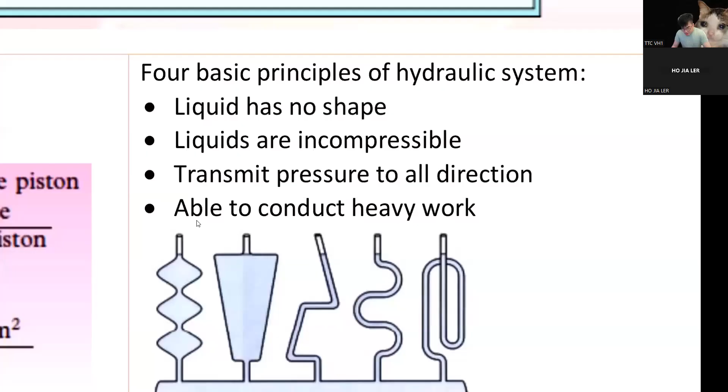Yeah, it's only you alone today. Maybe they're late or whatever, I don't know.

Right, so we're doing something easy today, luckily. Like I said, we have 2 chapters remaining, or 3, I forgot. So we are going into something easy, right? Pressure. This is a physics chapter.

Hello, Charlene. Wow, I haven't seen you in a while. How are you? I haven't seen you in like what, 3 weeks, I guess? 3 weeks. Okay, so we just started.

So guys, we are in chapter 8 today. This chapter is called pressure. And we only have 2 parts here. I'm gonna do one part today, and next week we are gonna do the other part. All right, a very easy and short chapter. I will finish this in 2 lessons, no problem.

Right, guys, shall we begin? Are you ready? Do you have your notes in front of you? Are you ready to absorb? This is quite an easy part to score if it comes out in exam, which is high probability. Right? So I begin. Charlene, Jella, can I get an okay if you are ready? Okay, cool. Right, so here goes.

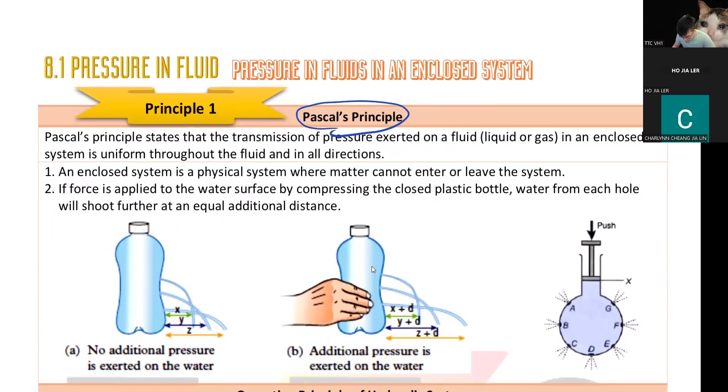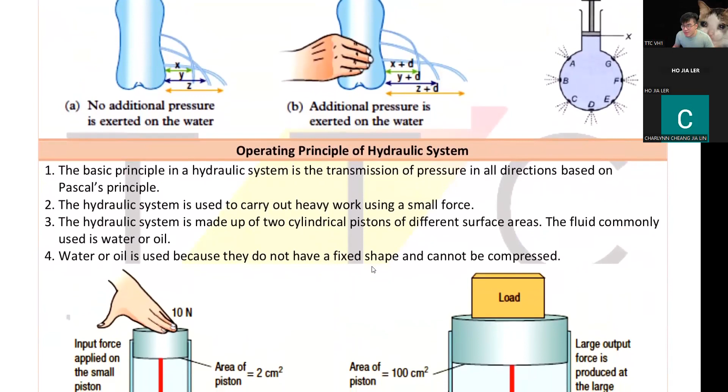This is what I want you to put in your head. Liquid cannot be compressed. Yeah, there, you see, liquids are incompressible. So when we press liquid, the liquid has to go somewhere, and the pressure is equally felt throughout the liquid. This is what Pascal said.

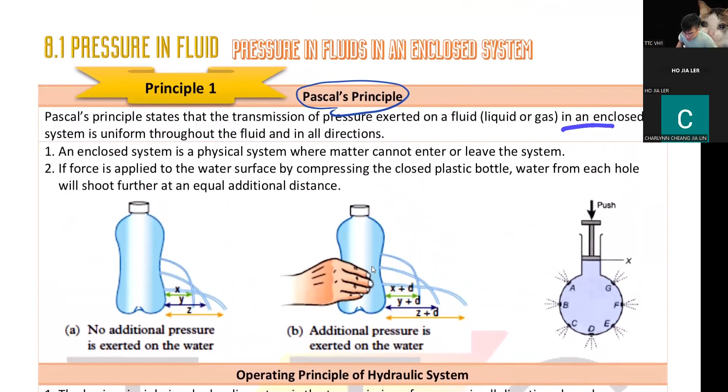Pascal's principle states that the transmission of pressure exerted on a fluid, liquid or gas, in an enclosed system, is uniform throughout the fluid and in all directions. What do I mean? Liquid cannot be compressed, right? So when I have this container which has holes at different points, when I press, this pressure here will be transmitted everywhere equally.

So guys, I have a question here. The water jet spray out from A, B, C, D, E, F, G, is it the same? Do I get any point that has more water, any point that has less water? No, right? So when I press here, I will get water jet spray out equally.

That means pressure is equal everywhere. This is what Pascal principle said. When you compress a liquid, pressure is equal everywhere. Let's say the pressure here is 100 Pa. Pa is the unit. I will get 100 Pa everywhere. No matter where you are in this liquid, you will feel the same amount of pressure.

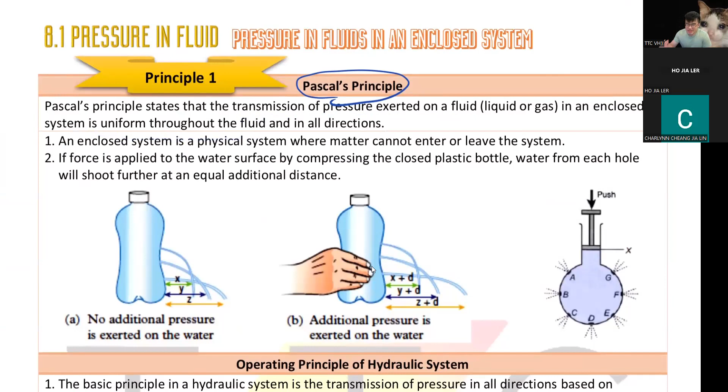All right. So you look at the definition again, you will understand. Transmission of pressure on a fluid is uniform throughout the fluid. You get the same pressure everywhere in the fluid. You guys cool? If you're cool, then I'm moving on. So this thing is where we apply it into hydraulic system.

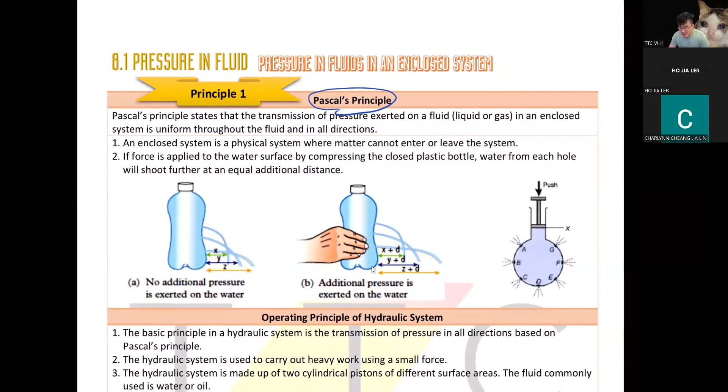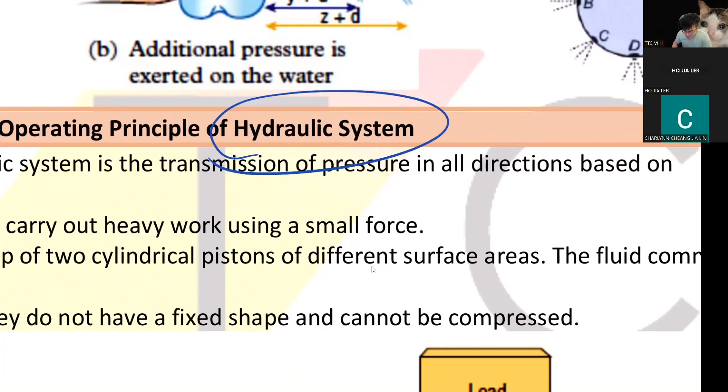Do you know what is a hydraulic system? Hydraulic system is when we use liquid to do work. Okay, guys, can you see I have two pistons here? This thing can freely move up and down. This thing also can move freely up and down.

Guys, question. When I press the first piston down, what's going to happen to the second piston? Can I compress liquid? I cannot compress liquid, right? So when I press the liquid down, let's say I press this down for 5 cm, that 5 cm of liquid has to go somewhere. So what happens to this?

Because you see, liquid cannot be compressed. The liquid has to go somewhere. That means if there's a pressure here, the pressure throughout the liquid is uniform. You see, uniform pressure throughout. That is the meaning of hydraulic. That is Pascal's principle. Okay, guys.

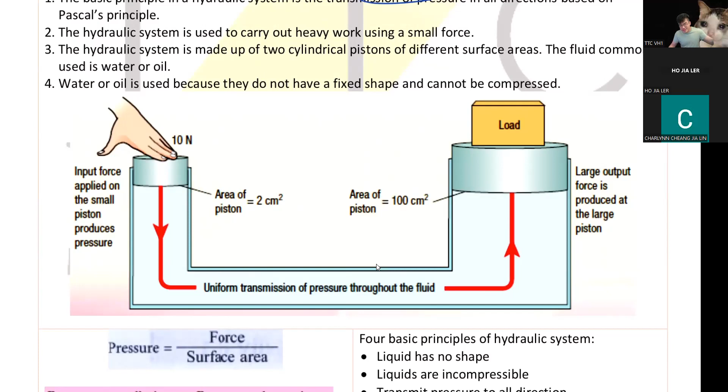Now here comes the calculation. I think this formula you have seen before already. I think you learned this in Form 2. Pressure equals force divided by area. Okay, let's look at this. This is the force, right? This is the area. So, force divided by area, my pressure here is 5. The pressure at the first piston here is 5.

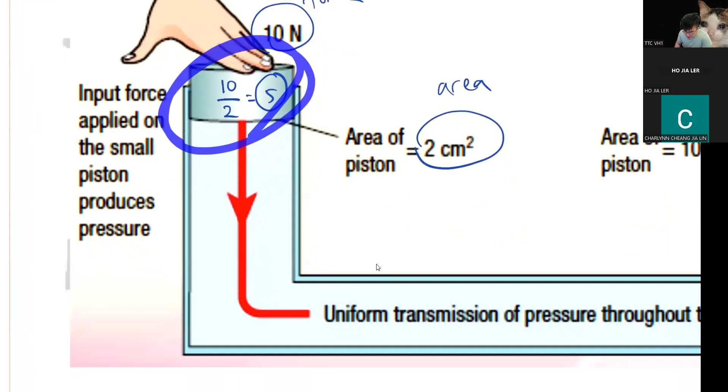That means no matter where I stand in the liquid, I will feel the pressure of 5. Do you understand? No matter where I stand in this liquid, I will get a pressure of 5. Because when I press here 5, everywhere will be 5. This is what Pascal said. Including here, I will get the same pressure here, which is 5.

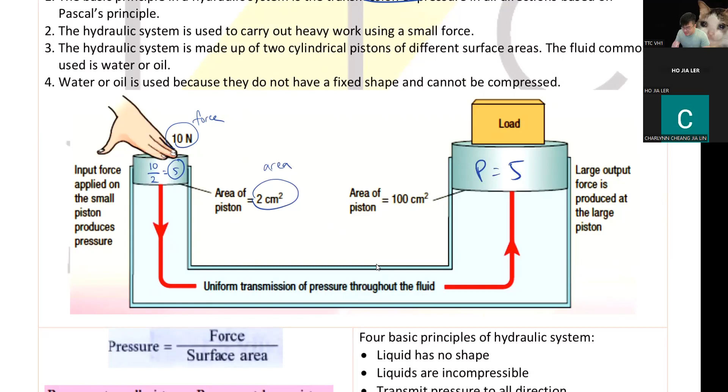You might say, okay, sir, cool story. So what? How is this doing any work for me? Very easy. I have the area here, 100, right? So what is the force of the load I'm lifting up? We reverse the equation P equals F over A. Pressure is 5, force I don't know, A is 100. So guys, what is the force? 500. Good. So that means I'm lifting a 500 Newton load.

Can you see this is the magic of hydraulic? Both sides same pressure, 5, 5, right? But small piston, small force. Big piston, big force. Can you see this is the beauty of it? That means I can use a very small force to lift a very heavy object. In fact, this is 50 times heavier. I just have to push with a very light force and I can lift something 50 times the weight. That's the magic of hydraulic.

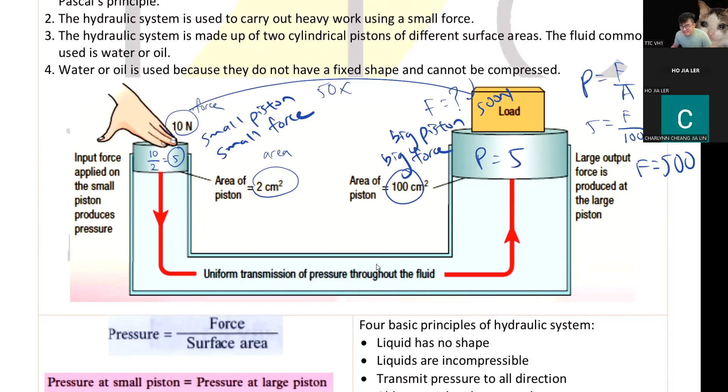So guys, when you're pressing on the jack, are you pressing on the small piston or the big piston? Are you using a small force or a big force? You're not pressing the car, you're pulling the lever. Are you pressing on a small or big piston? You're pressing on the small piston, right? Because you're using a small force. And the big piston should be under the car, to create a big force to lift the car.

Guys, cool? Are you okay with this? So easy, right? So hydraulic is a very awesome machine. I can use a very small force to lift a very heavy load. How many times I want depends on how big I make this. If I make this piston even bigger, I can lift an even heavier load. Okay? Easy, huh?

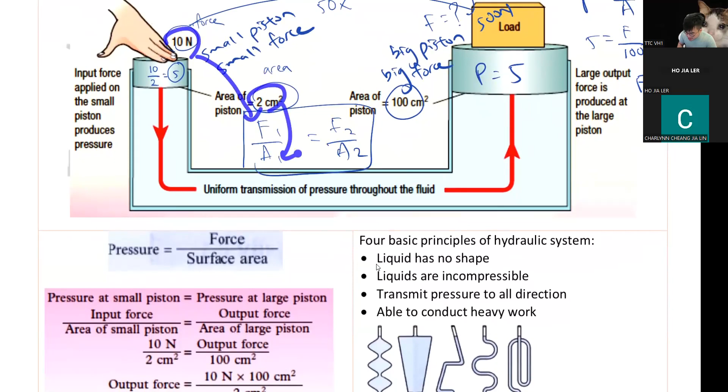So guys, to make your calculation simple, sometimes we summarize it like this: F1 over A1 equals F2 over A2. I straight away sub in the force, the area, the area again, and calculate my force. So my force is 500. This is the shortest way. You can also calculate the pressure first, then put in the pressure and do it again. Same calculation, but this is the quick and fast way.

Okay, hope you guys are okay, huh? Easy stuff, huh? This is really easy stuff. There's only one calculation for this chapter, in fact. Okay, there's only one calculation.

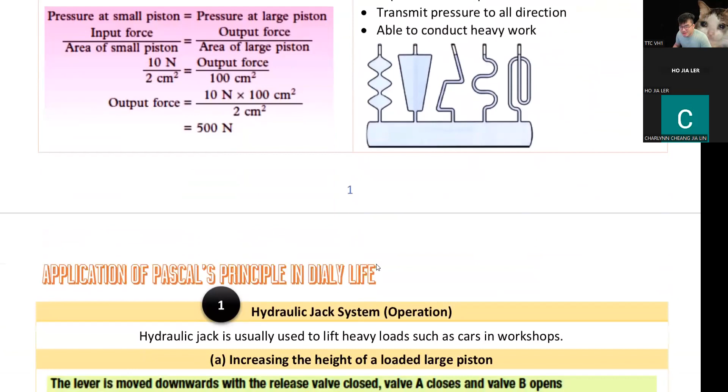Okay, so where do we use this? Let's look at application now. We use this in our hydraulic jack. Like I said just now, this jack here. But of course, this jack is not so easy. Like, oh, I press this down, this thing will go up, as in like that.

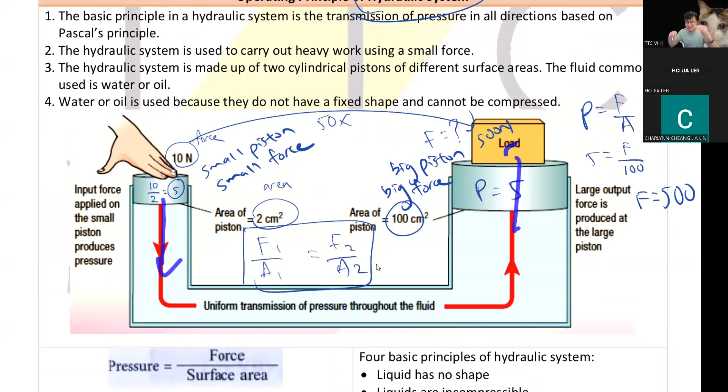No, guys, have you seen this before? Have you guys followed your dad to the workshop before? It's not like you press it once and the car goes up. No, you have to keep pressing and pressing. You have to do it a few times, and then the car will go up, up, up.

Maybe you have followed your dad to a tire shop. Maybe your car has a punctured tire. Then you go to the workshop. They will use this thing to lift your car. Right? Maybe you have heard of it. Maybe you have seen it. I don't know. Okay, so this is how it works.

So why do I need to keep pressing and pressing? This is how it works, right? As we learned just now, small piston, big piston, same thing. Why small piston here? Because you use small force to push. So small piston, small force. Big piston, you're trying to lift a very big load. So big piston, big load.

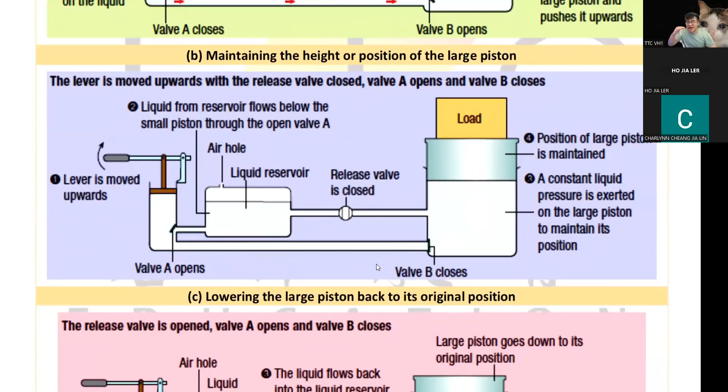But you see, here's the problem. If there's none of all these, something stupid will happen. You push down, the car goes up. You pull up, the car goes down. So won't the car just go up, down, up, down? It looks really stupid. So what do they do? Now we have all these valves here and this tank here. Pay attention to this tank here.

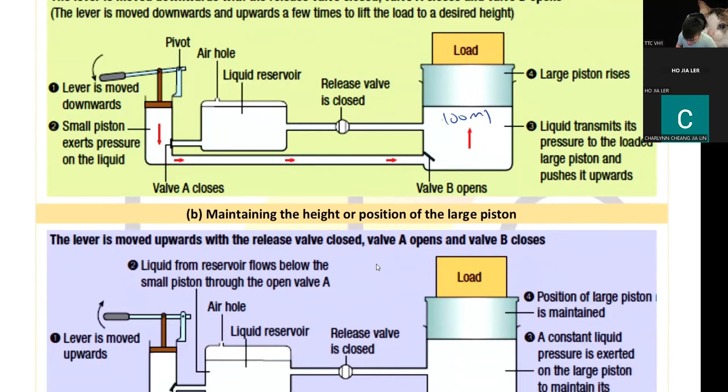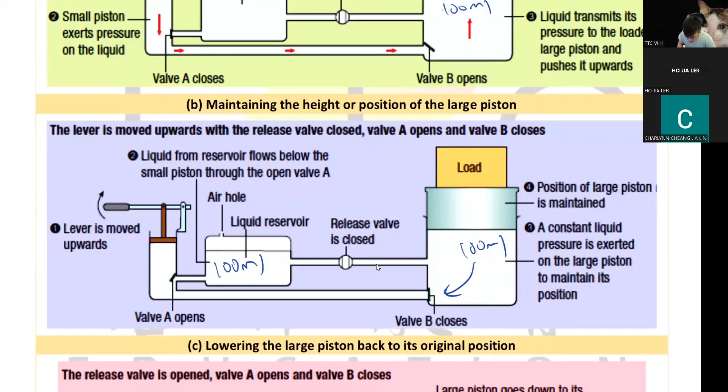So what's going to happen, let's say I press 100 ml of liquid here, the 100 ml will push this load up. Now, when I draw back up, I don't want this 100 to come back. I want it to stay here. So I have these two valves. This valve will close so that the 100 cannot come back. It will stay at this height. Now this will open. I will draw 100 from here instead.

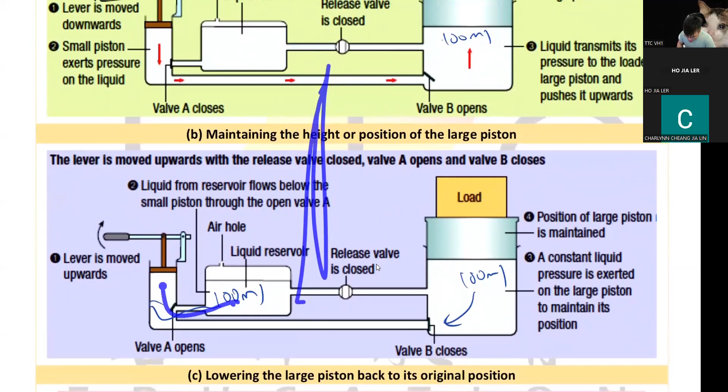So this thing repeats, lor. I draw 100 here. Now this thing is filled. Now I push another 100 here. Then I draw another 100. I push another 100 here. So as I keep drawing, pushing, drawing, pushing, this place here will have more liquid. So this thing will go up, up, up.

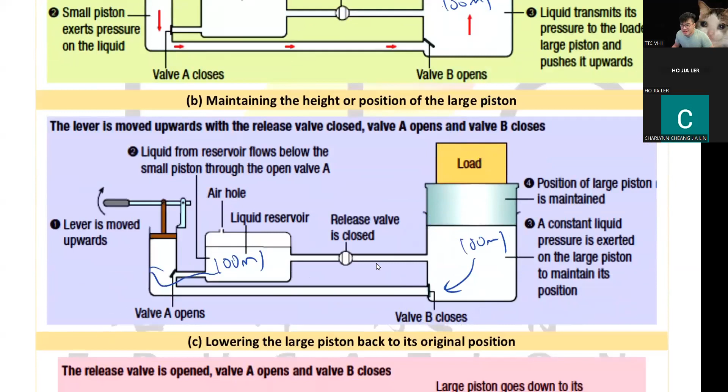Does it make sense to you? I push liquid here. I draw liquid from another tank. Then I push it here again. I draw from another tank. I push it again. Draw, push, draw, push. This thing will keep going up.

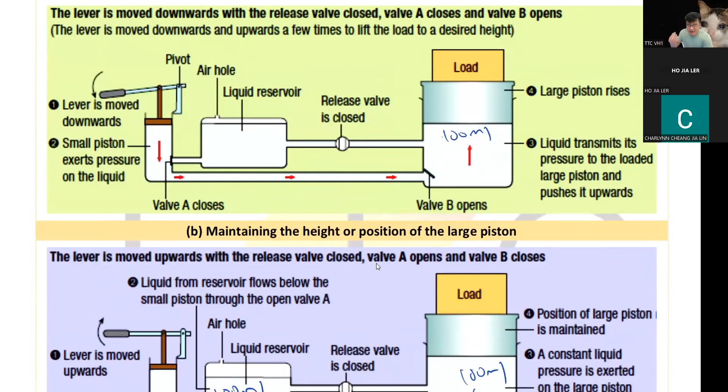Right? So now what happens when I want to let this thing down? After I fix my car, I want to put the car down. Very easy. There's a release valve here. Once I open it, all the mLs, let's say you have 500 mL here, everything will flow back to this tank. Now this thing is reset to normal level.

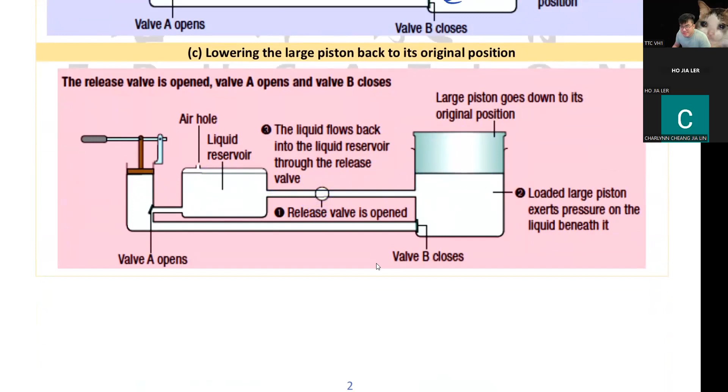Okay? The release valve is usually here. Can you see a stick there? When you turn it, the car will come down. That's the release valve. Usually lah. Usually it's that way.

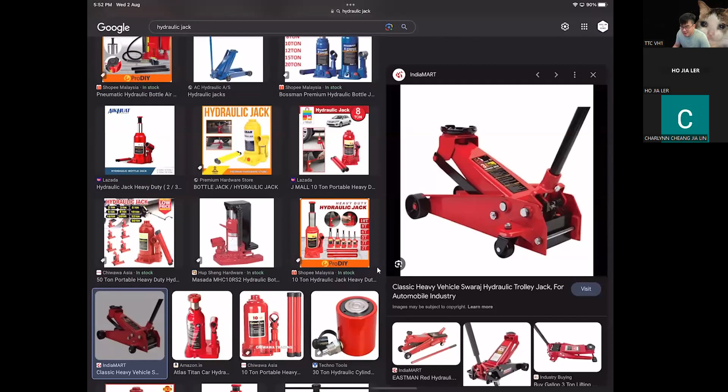Guys, do you have any question? They won't ask you the exact operation in SPM. Okay, they won't ask, but it's good to know. It's good to learn.

Okay, my point is, this is hydraulic. I'm using a small force to lift a very heavy load. I'm using maybe 10 kilo of force to lift a 1000 kg car. You see, I'm amplifying my force by 100 times. So this hydraulic is a very good system. It's a very good machine.

We even use it in our brake. Okay, in our brake. You know your car brake, guys? So same thing. You know your car has a brake pedal, right?

Guys, you're allowed to drive now, I hope. You're 17 this year. After you pass your birthday, you're 17. Now you're allowed to take your driving test. Now I'm sure you can drive already if you took your driving test.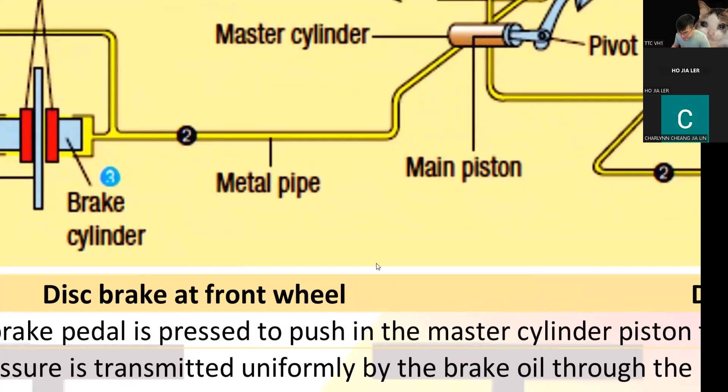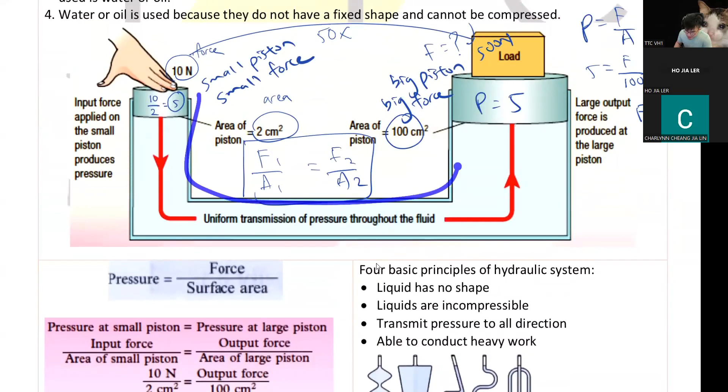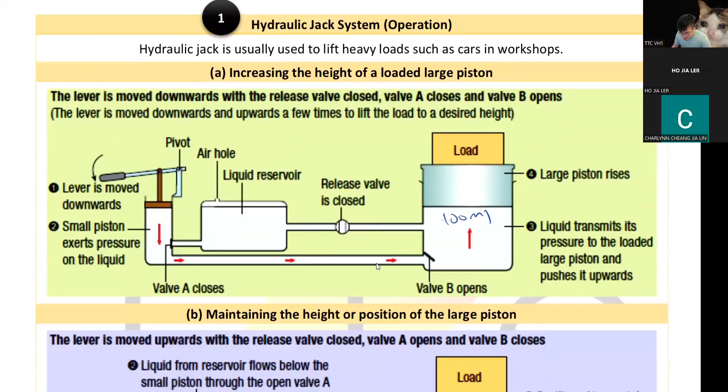And just to give you some extra info, for all hydraulics, we cannot use water. You might say, sir, water is a liquid, right? Why don't we use water? Because water is not very stable. Water has very low boiling point. Guys, hydraulic fluid, they need to get hot.

They get hot because when you are driving, you keep stepping on the brake. As you keep stepping on the brake, you are making the brake fluid hotter. So as it gets hot, if you put water inside here, water will get hot and then it will boil. Once it starts to boil, you start to get air bubbles inside.

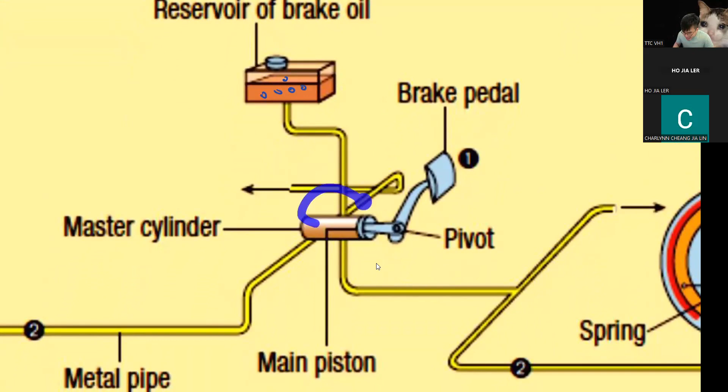Guys, I have a question here. If you have air bubbles in your hydraulic system, what's going to happen? Is it good news or bad news? No, it won't go kaboom. You see, liquid cannot compress, right? That means if I press down, like I said just now, you press down 5 cm, 5 cm will go up here. All the force is transmitted to the next piston.

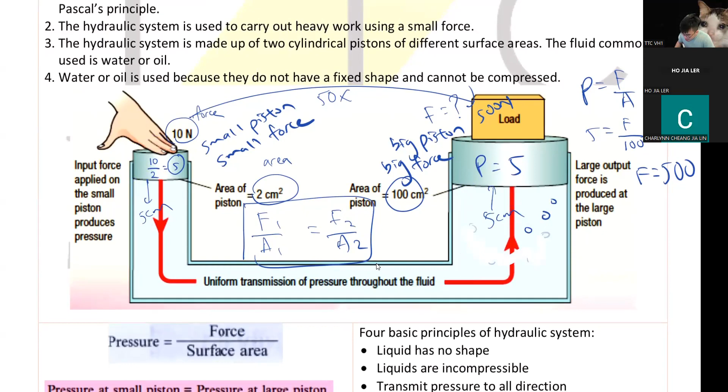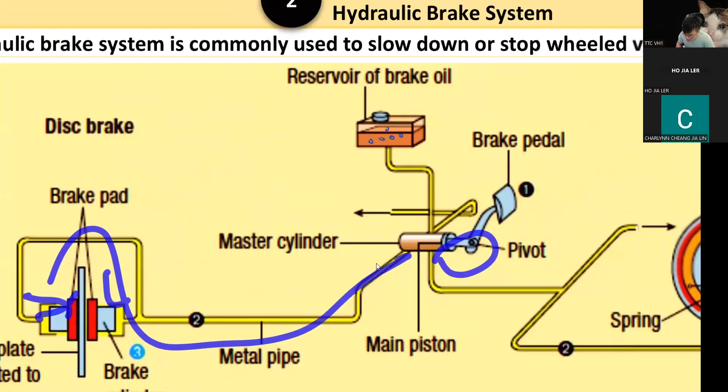But if you have a lot of bubbles here, when you press on this, instead of going up here, you're wasting energy to compress the bubble. You're making the bubble smaller instead of transmitting the force. So if you have bubbles in your braking system, when you step on the pedal, you are not sending the force to your front brake, but instead you are squishing the bubble.

So now your brake is going to feel spongy. Spongy, your brake doesn't feel very firm. When you step on a brake, you can feel the brake clamp on your car wheel and it feels very firm. But if when you step on the pedal, it goes all the way to the floor and it doesn't feel very confident, that means you have air in your system.

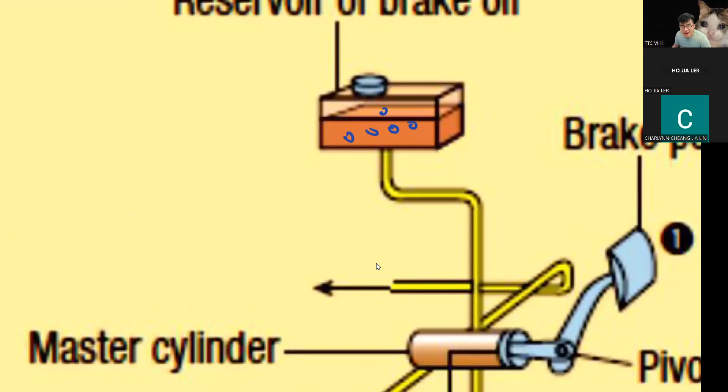That's why when you're changing your brake fluid, it is very important to get rid of all the air in it. Because if not, your braking system will fail and it's a very dangerous situation to be in. You don't want your braking system to have air.

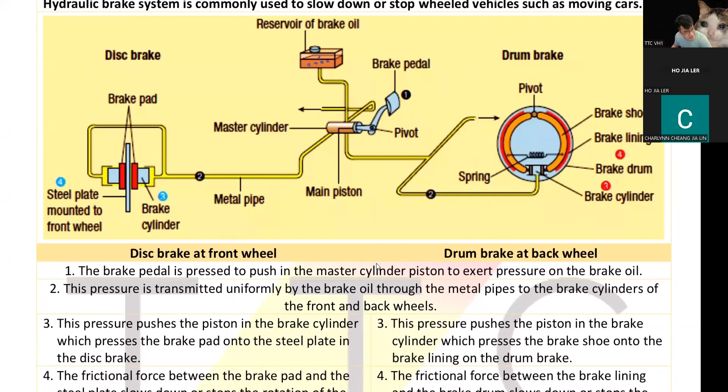Okay, so this is your brake. Hey, sir, how come front brake and rear brake are different? Front brake, they will use disc brake, and rear brake, they will use drum brake. This just lets you know, because the front brake should be stronger than your rear brake. Okay, the front brake should always be stronger. So this brake is stronger.

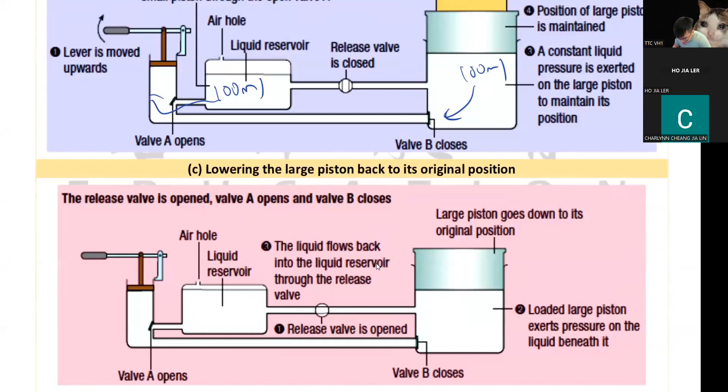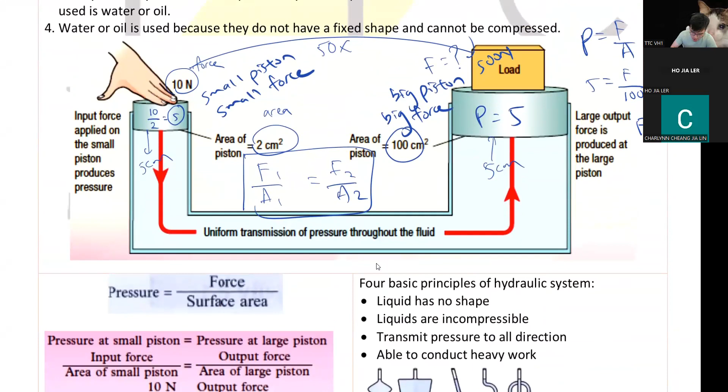Okay, so this Pascal's principle is done. Right, guys, do you have any questions? Are you okay with the calculation? If you're okay, then we shall go to the exercise. Do let me know if you have any questions. Okay, guys, can you please go to page 6? You see this chapter only has 5 pages of notes. So let's go to page 6.

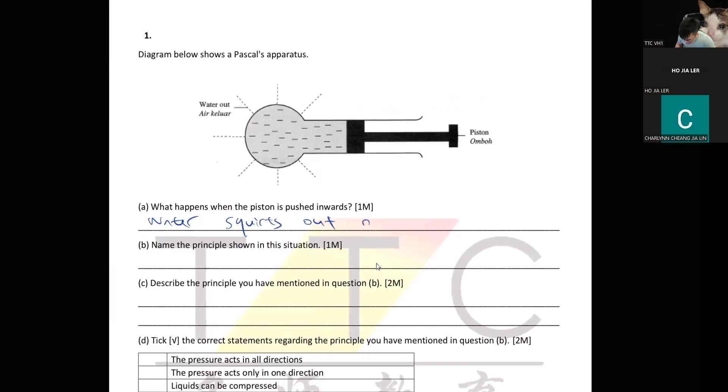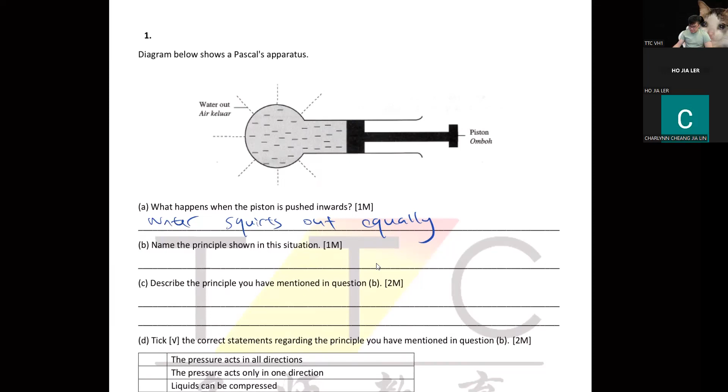Okay, let's look at number 1. This is the same thing. When I press this, water will squirt out equally because it's the same pressure. Pressure in a liquid is always the same. What happens when the piston is pushed inward? When you push it inward, water squirts out equally. Next, name the principle shown. What principle is this? This is your Pascal's principle.

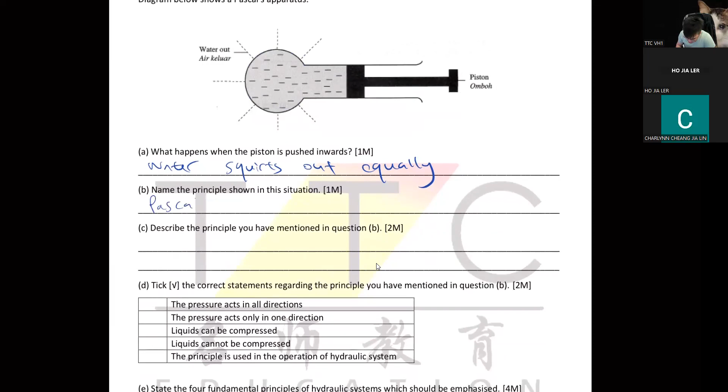Okay, Pascal's principle. Describe the principle you have mentioned in B. What does Pascal's principle say? So, pressure exerted on an enclosed fluid is transmitted uniformly throughout the fluid. This is what I put. Yours might be different, like uniform in all directions, whatever. Okay, as long as the meaning is there.

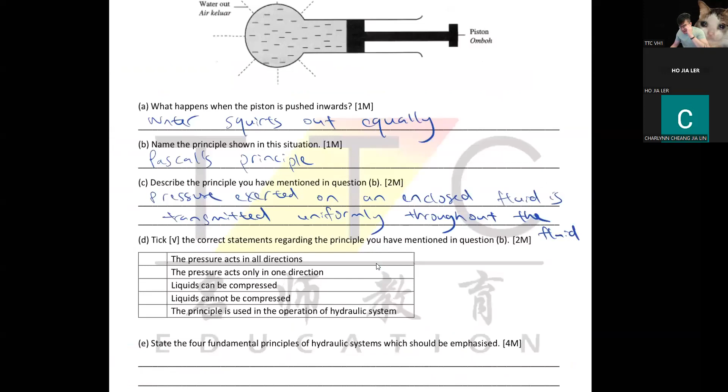You guys okay so far? This is more explaining than calculation. So tick the correct statements: pressure acts in all directions, not one. Liquid cannot be compressed. It's used in hydraulics. Okay, so E we skip, not important.

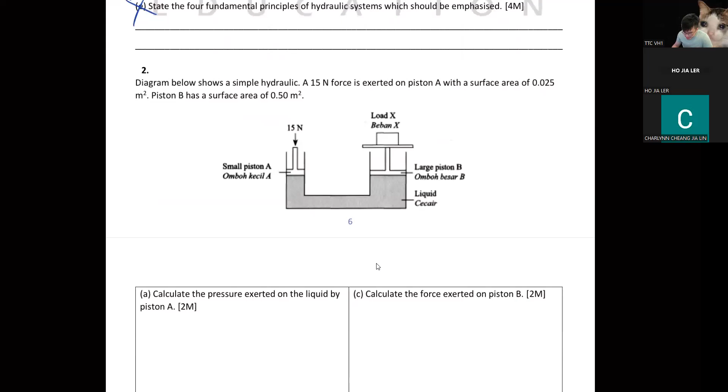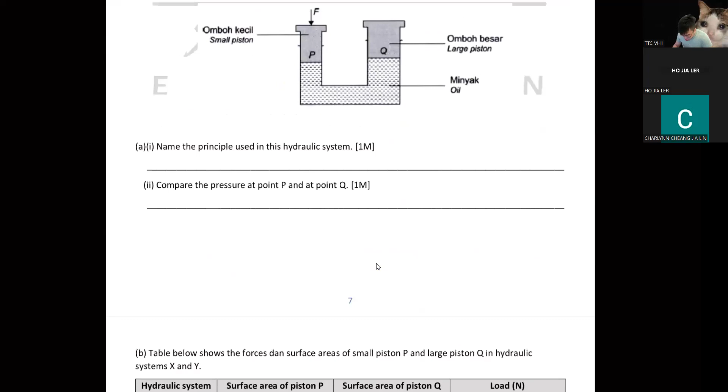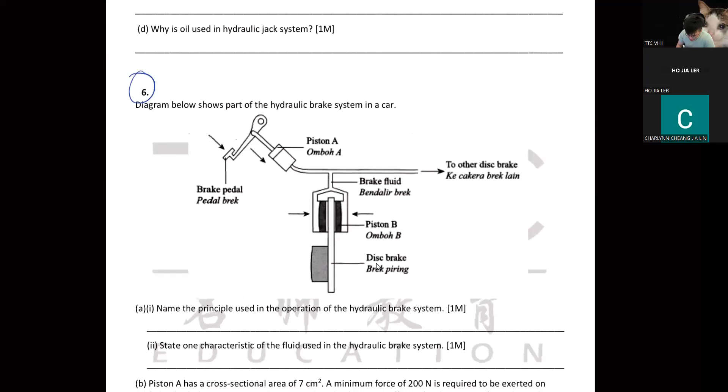All right, guys, can I give you some homework since we have some time? Can you please do question 2, question 3, and question 6. That's all. I'll give you 15 minutes. You may try this now. I'll come back with the answer later. Don't sit here and wait for the answer. Please do. I'll give you the answer in 15 minutes. See you then.

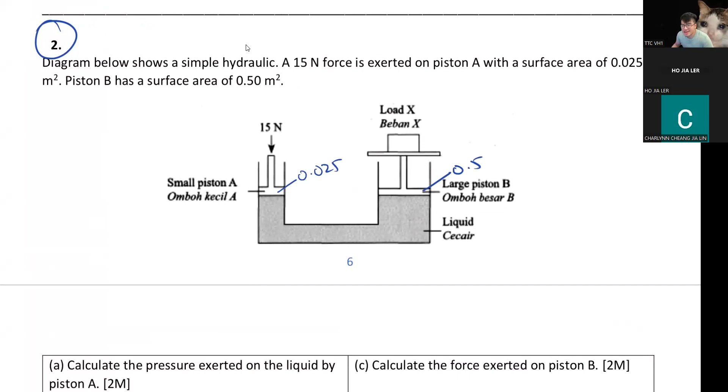All right, guys, are you done? Can I give you the answer? So this question 2 is very easy. Pressure exerted on the liquid on piston A. By the way, let me write out the area first. This is 0.025. This is 0.5. Are you guys still there? So pressure on piston A, P equals F over A, which is 15 over 0.025.

So what's the answer, guys? Can anyone give me the answer? I'm too lazy for the calculator. 15 divided by 0.025, what do you get? Hello, anyone? What's the answer here?

No, don't convert to cm, because if you convert, it's gonna be a lot of trouble. Just stick to meter, because the SI unit is meter. So if they give meter, you stick to meter. There's no need to convert. They give you cm, you use cm. They give you meter, you use meter. So what's the answer?

Jella, are you there? Did you do this? What's the answer? Hey, nobody did this. 600. Thank you, Shahid. Okay, 600. The unit is Pa, Pascal. Or you can just stick to newton per meter square. Also okay. 600.

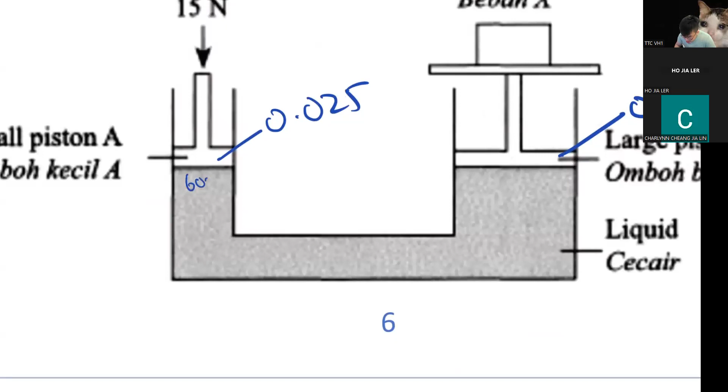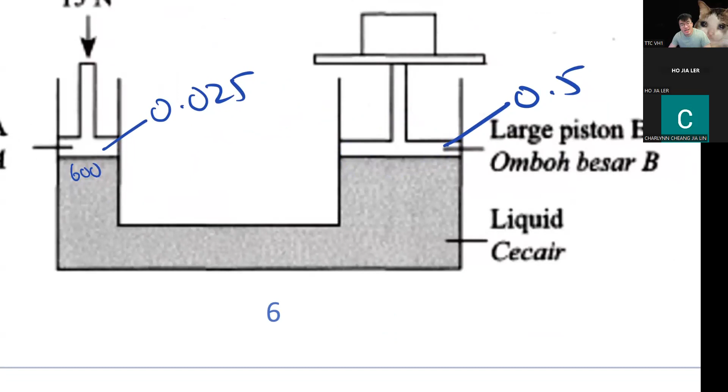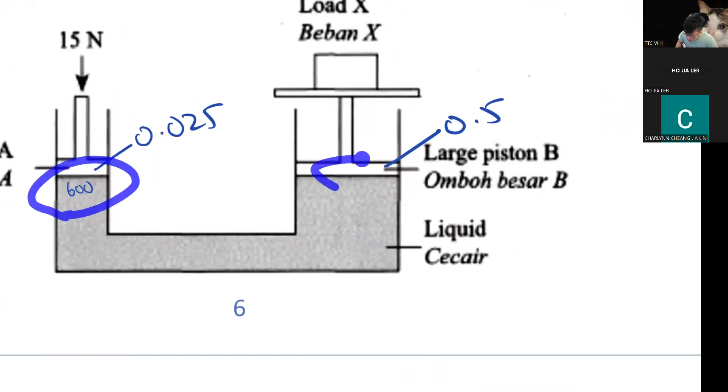What about the pressure at B? Do we need to calculate this? If the pressure here is 600, what is the pressure here? According to Pascal's principle, pressure exerted on a fluid is uniform, it's the same, right? That means if the pressure here is 600, the pressure here will also be 600. No calculations needed.

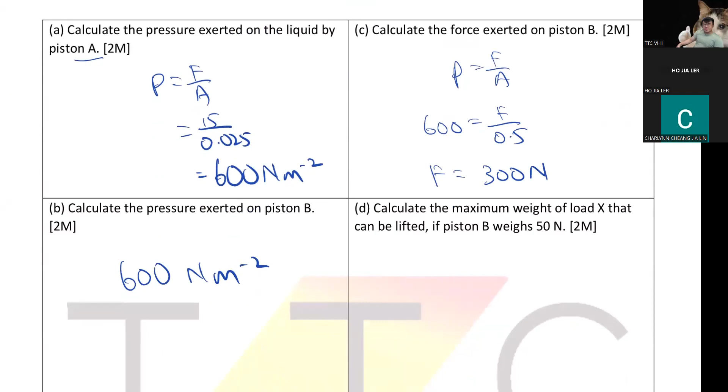Now they want the force on piston B. So P equals F over A. P is 600, A is 0.5. So F is 300 newton. Easy. 300 newton is the force you are creating. You are using 15 newton to lift 300 newton. That's 20 times the weight. You are lifting 20 times more.

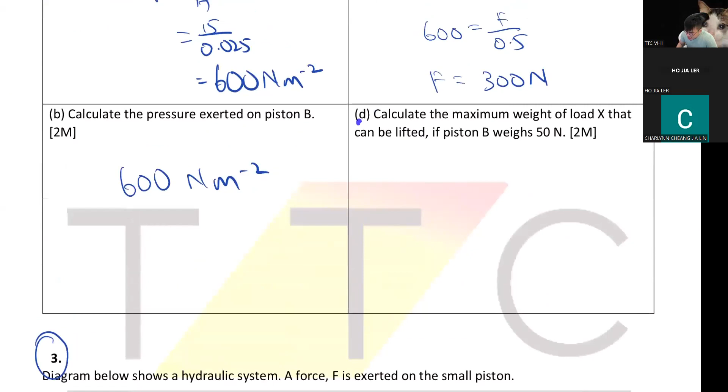All right. So D, calculate the maximum weight of load X that can be lifted if piston B weighs 50 newton. If this piston itself is 50, what's the weight that can be lifted? Do you understand this question? That means this whole thing is 300, right? Because the piston itself has weight, 50, what is the load here?

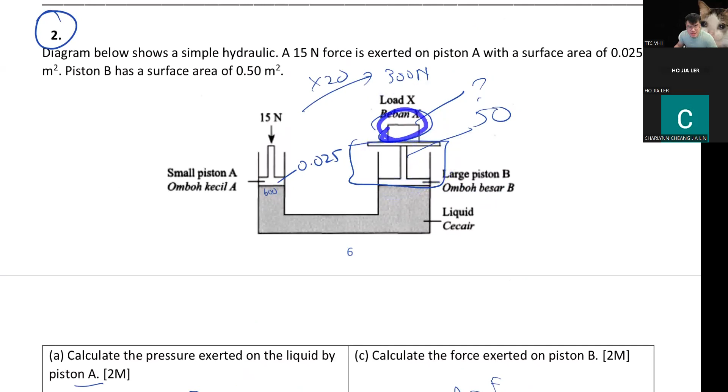300 minus 50. So the answer is 250. Do you understand this? The whole thing here, I can lift 300, but I have to consider this piston that I'm lifting. This piston itself is 50, so I can only lift 250 here. We have to consider the piston also.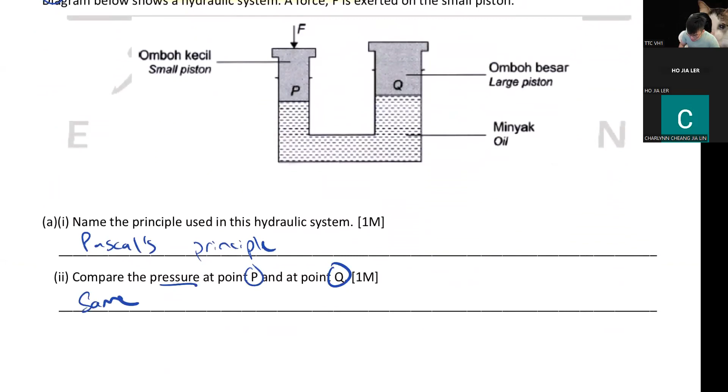All right, so number 3, name the principle. This is your Pascal's principle. Compare the pressure at P and Q. Like I said, pressure is the same throughout. Same or similar. Like just now, 600, 600.

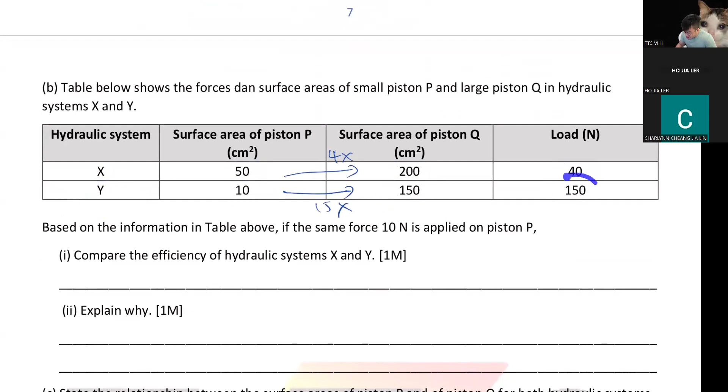Okay, so B, we have two systems here. System X is 50 cm to 200 cm. I'm lifting 40. System Y, 10 cm to 150 cm, I'm lifting 150. So can you see this is like 4 times, this is like 15 times. Obviously, Y is a better system because I can lift something heavier. Whereas X is only 4 times.

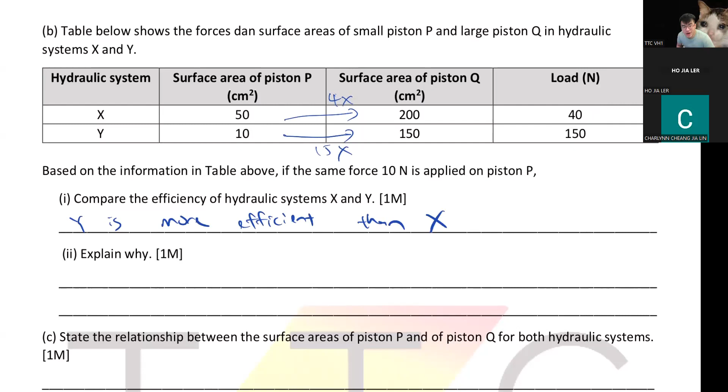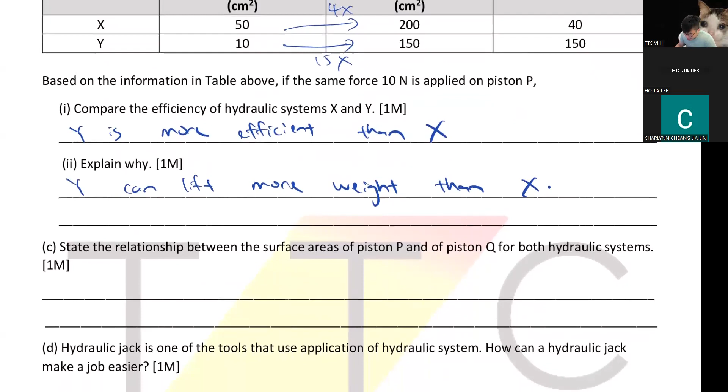So compare the efficiency of the hydraulic system X and Y. So who is more efficient? Y is more efficient than X, because it can lift more. Explain why. Because Y can lift more weight than X. So relationship between surface area for both. Surface area of P is smaller than Q. Obviously, because Q is bigger, P is smaller.

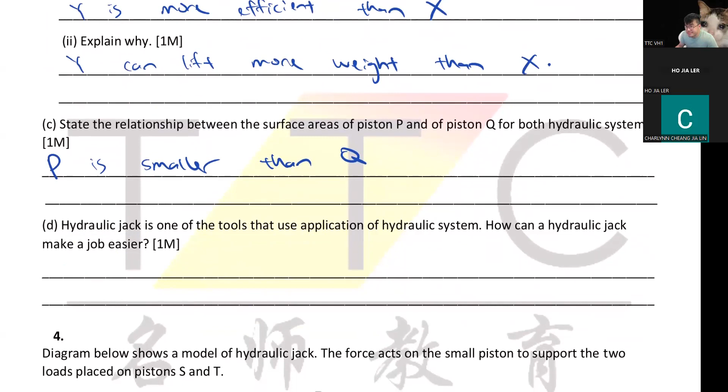So hydraulic jack, the one we lift our car, is one of the tools that use hydraulic system. How can a hydraulic jack make your job easier? It can increase, or you can say it can amplify our force applied. Amplify the force to something bigger. Just like this. I push with 10, I lift 150. I'm lifting 15 times my force.

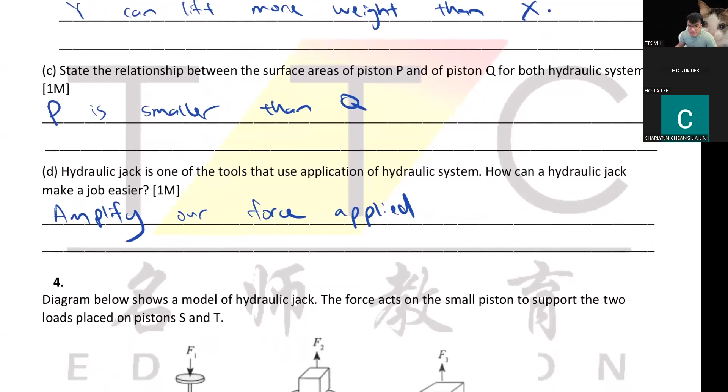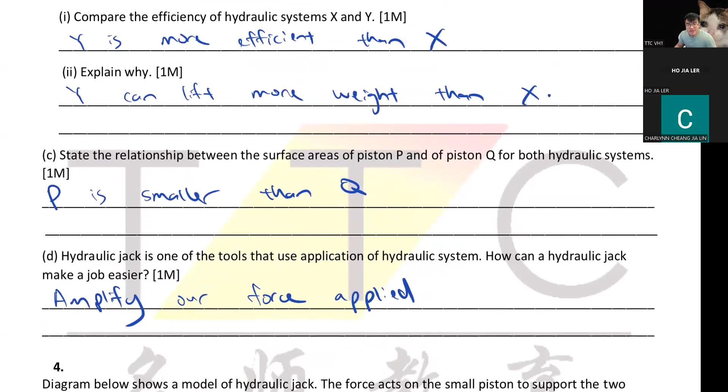Right? You guys okay? Very simple. Jia Ler, are you still there, Jia Ler? Don't fall asleep, stay with me, I have 5 more minutes here.

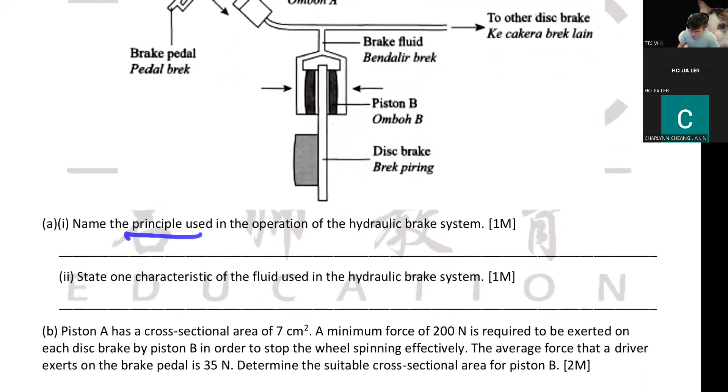Name the principle used. Again, this is Pascal. One characteristic of the fluid: fluid is incompressible. Must be incompressible. Because if it is compressible, then it has bubbles, then it's not a very good liquid.

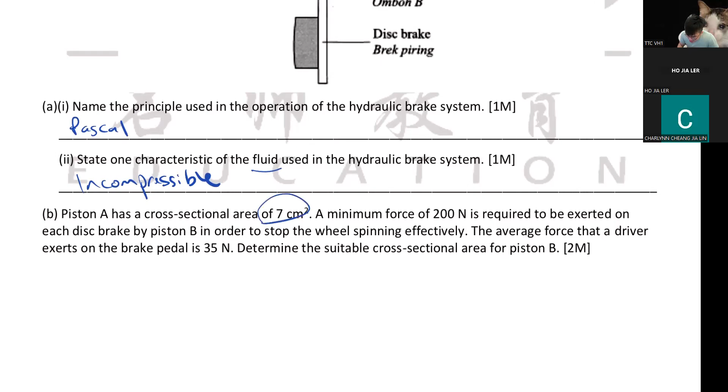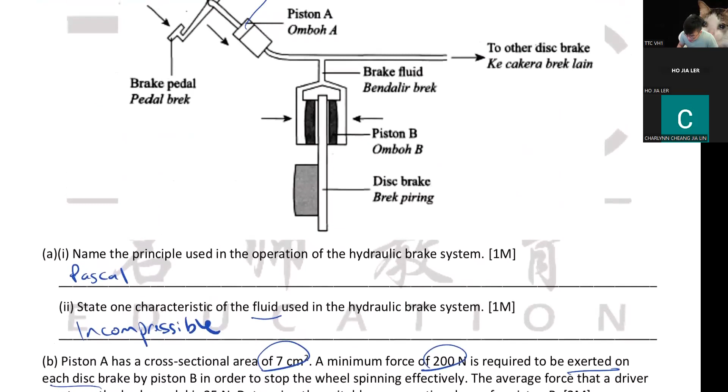So piston A has area of 7. This part is 7. 200 Newton is required to be exerted on each disc brake by B. So each brake needs to give 200 Newton to stop the wheel spinning effectively. The average force that the driver exerts on the brake is 35. We are stepping on the brake with 35 Newton. So determine the cross-section area for B. What is the area here?

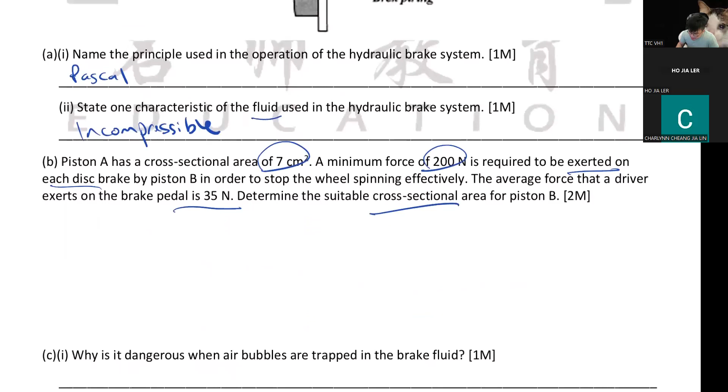Very easy. F1/A1 equals F2/A2. So 1 is here. F1/A1 is 35 over 7. F2 is 200 over A2. This is 5, so A2 is 200 over 5, 40 cm square. So the area here should be at least 40 to give you this force.

Simple calculation, this is like one step, so you use this. You can also use the method from our question 2. You do the pressure first, P equals F over A, divide it out, and then you sub in to the other side. Can also, but this is more time saving.

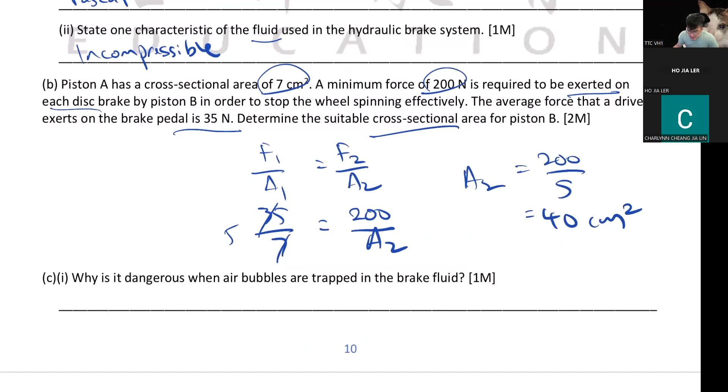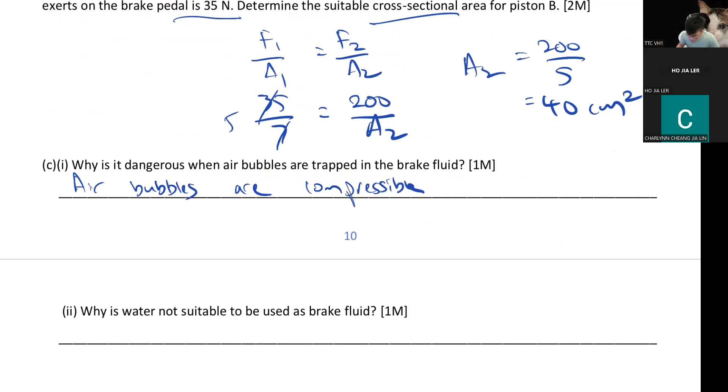So C1, why is it dangerous when air bubbles are trapped in the brake fluid? I said it just now, because air bubbles are compressible. You can compress air bubbles. Why is water not suitable? Because water has low boiling point. If you have a low boiling point liquid here, it will easily boil and evaporate. So now you have air inside, which makes it very dangerous. So brake fluid usually has high boiling point to really stand that high temperature.

Okay, guys, are you okay? If you're okay, I'm just gonna end it here. Next week we will go to Bernoulli's principle, which is the last part of this chapter. There's only 2 parts of this chapter.